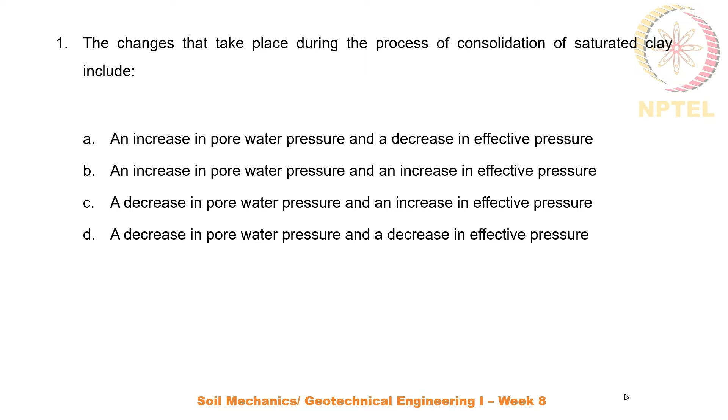All right. So the correct answer is option C. So during the process of consolidation, pore water will get expelled out of the soil pores. So pore water pressure decreases and hence effective stress will increase. I hope that is clear to you. During the process of consolidation, the pore water is being expelled and hence the pore water pressure decreases, which in turn causes the increase of effective stress.

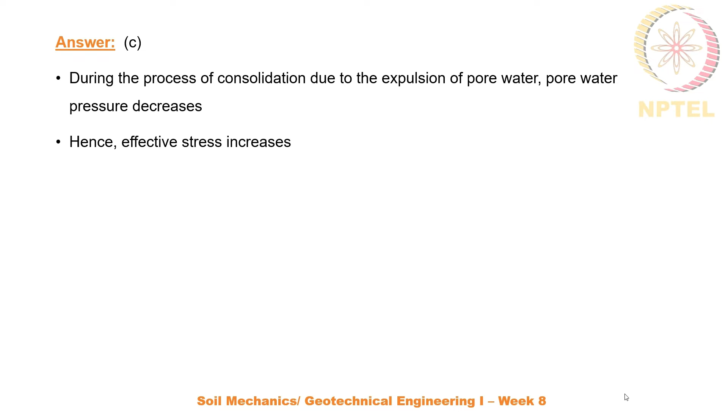Moving on to the next question. The stress strain behavior of soils as shown in the curve 2 in the figure corresponds to option A, loose sand and over consolidated clay. Option B, loose sand and normally consolidated clay. Option C, dense sand and normally consolidated clay, and option D, dense sand and over consolidated clay. So the curve 2 represents which type of soil? Loose sand, dense sand, normally consolidated clay, or over consolidated clay? The given graph is a stress strain graph. Which one is the correct option?

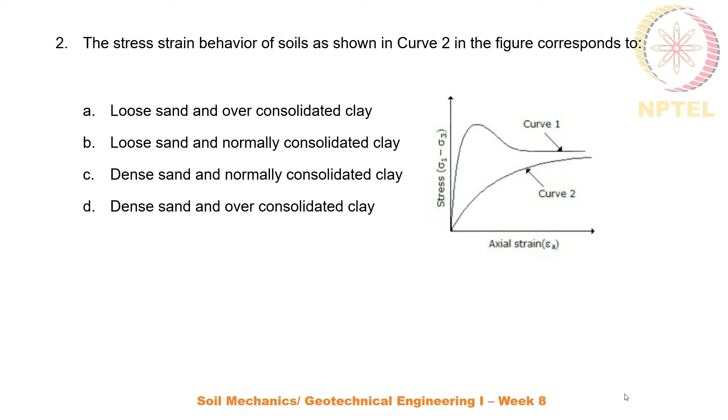Okay, so the correct answer is option B. So we know these two graphs. This is the standard graph plotting deviator stress and axial strain, deviator stress on y-axis and axial strain on x-axis. There we can see the lower curve, that is the curve 2 in our problem, represents loose sand and normally consolidated clay. Curve 1 represents dense sand and over consolidated clay.

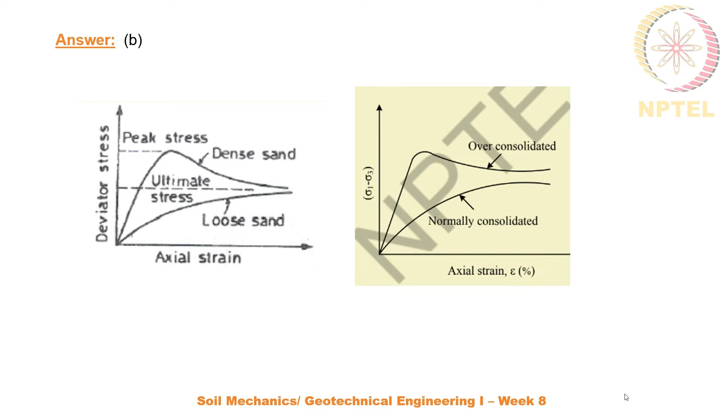Alright, so here we have the third question. The void ratio pressure diagram of a soil sample is shown in figure below. We are given a void ratio pressure diagram and asked to determine the coefficient of compressibility. Option A 0.35, option B 0.2, option C 0.15 and option D 0.014. It's easy to solve. It's a direct substitution in the equation for coefficient of compressibility connecting void ratio and pressure. So which is the correct answer?

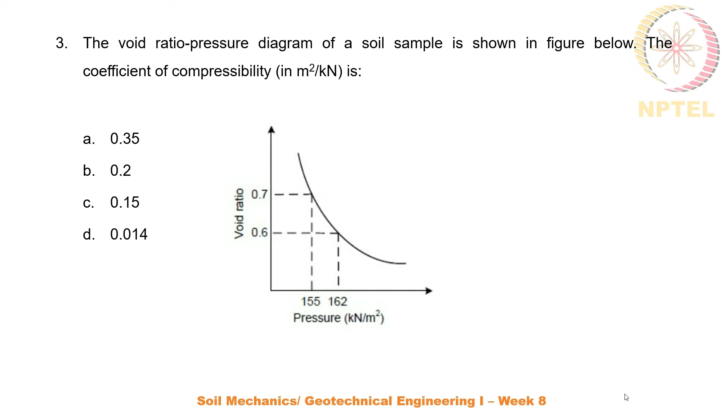Okay, let's see which is the correct option. So we are given the void ratio initially as 0.6 and finally 0.7. In this curve we are given two void ratios and corresponding pressure values, e1, e2 and p1, p2. So e1 is 0.6, e2 is 0.7, p1 155 and p2 162. The coefficient of compressibility is given by the equation delta e by delta p.

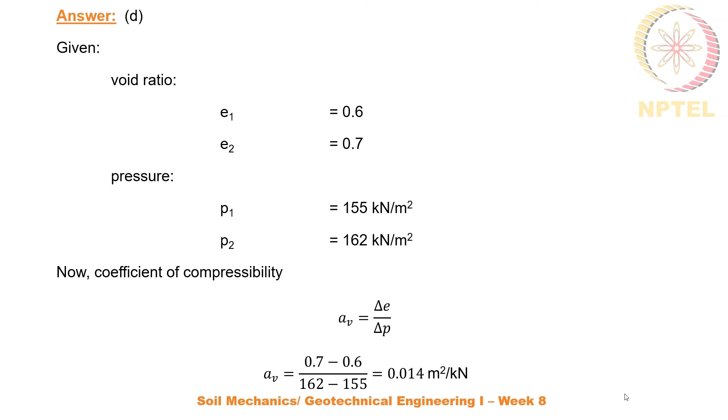That is, the ratio of change in void ratio to change in pressure gives the coefficient of compressibility. So, substituting the given values, we get coefficient of compressibility as 0.014 meter square per kilonewton. The answer is option D. Hope that is clear to you.

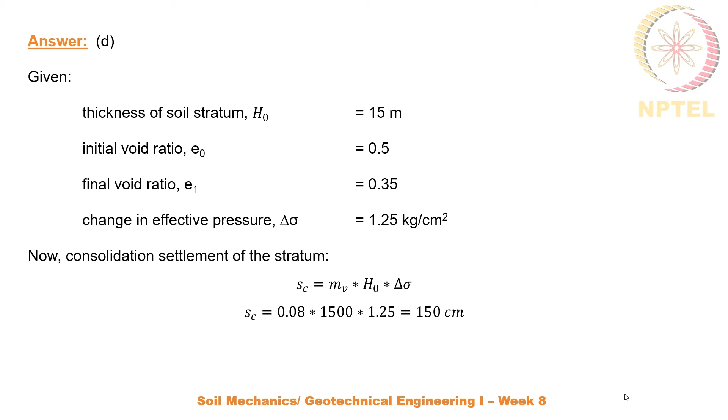Okay, I think we have lost the friend who answered it as C. I think it's clear to him also. Okay, we'll move on to the next question.

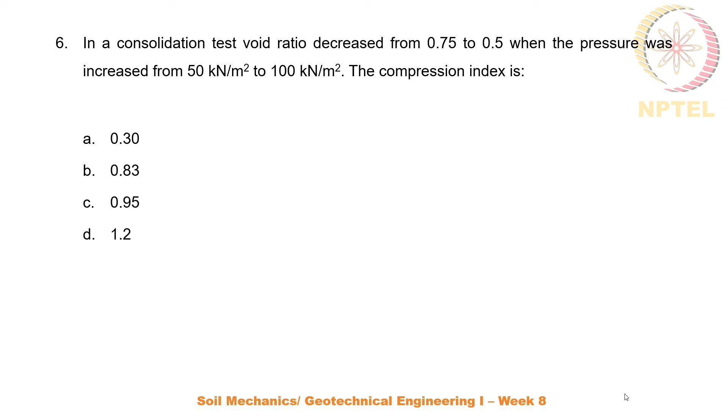Option A 0.3, option B 0.83, option C 0.95, option D 1.2. Which is the correct option? Okay, so we'll check how to solve this problem. We are given the initial void ratio 0.75, final void ratio 0.5, initial pressure 50, and final pressure 100.

The compression index is given by the equation Cc is equal to delta e by log to the base 10 sigma 2 by sigma 1, or P2 by P1, where sigma or P represents the pressure and e the void ratio. Substituting the values, we have compression index Cc is equal to 0.75 minus 0.5 divided by log to the base 10 of 100 by 50. So the value we get is 0.83. The compression index we get as 0.83.

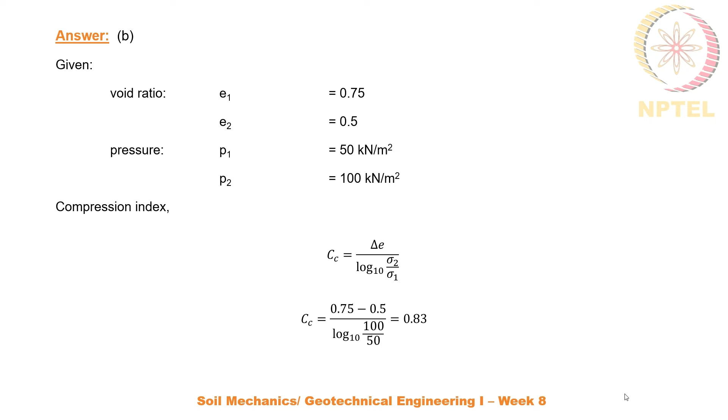Okay. Next question, question number 7. The natural void ratio of a 4.8 meter thick saturated clay strata is 0.97. The void ratio of the clay at the end of the consolidation is expected to be 0.64. The total consolidation settlement of the clay strata is option A 80, option B 90, option C 70, and option D 50.

We are given that the natural void ratio of the 4.8 meter thick clay layer is 0.97 and the final void ratio is 0.64. We are asked to determine the total consolidation settlement of the clay strata in centimeter.

Okay, the correct answer is option A. So we are given initial void ratio as well as final void ratio, also the thickness of the soil strata. So the total consolidation settlement of the clay strata can be estimated by using the relation between delta H by H and delta e by 1 plus e0.

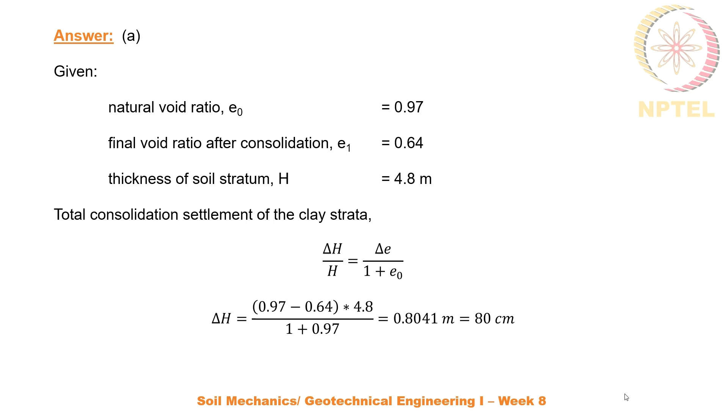Okay, moving on to the next question. Question number 8. Due to the construction of a new structure, the average vertical pressure at the center of a 2.5 meter thick clay layer increases from 100 kilopascal to 200 kilopascal. A laboratory consolidation test was performed on a 20 mm thick undisturbed sample of the clay. Under applied stresses of 100 kilopascal and 200 kilopascal, the void ratios of the sample were found to be 0.9 and 0.786 respectively.

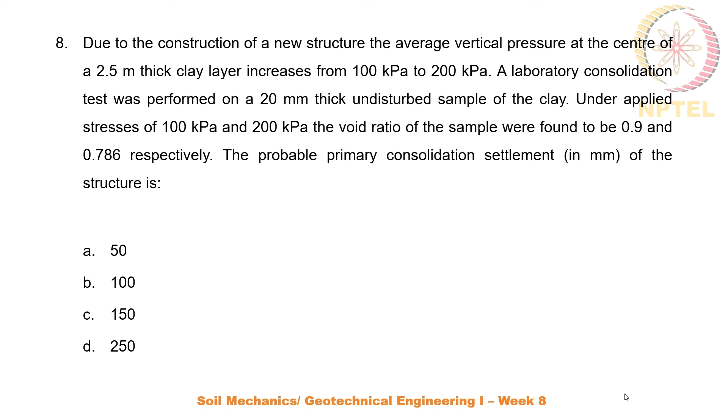The probable primary consolidation settlement of the structure is option A 50, option B 100, option C 150, option D 250. So here the vertical pressure is increasing from 100 to 200 kilopascal and the void ratio is decreasing from 0.9 to 0.786. We are asked to determine the probable primary consolidation settlement for the structure. The correct option is option C.

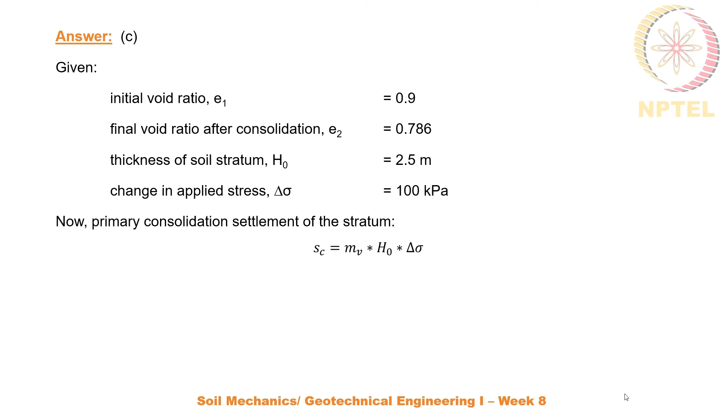So we are given initial void ratio and final void ratio, thickness of the soil stratum and change in applied stress. So the equation for primary consolidation settlement, as we have seen in the earlier questions, Sc is equal to mv into H naught into delta sigma. So here mv is equal to delta e by delta sigma into 1 plus e naught, which gives the coefficient of volume change as we have seen in the earlier problems. H naught is directly given in the question and delta sigma is also mentioned. So first we need to calculate the coefficient of volume change mv.

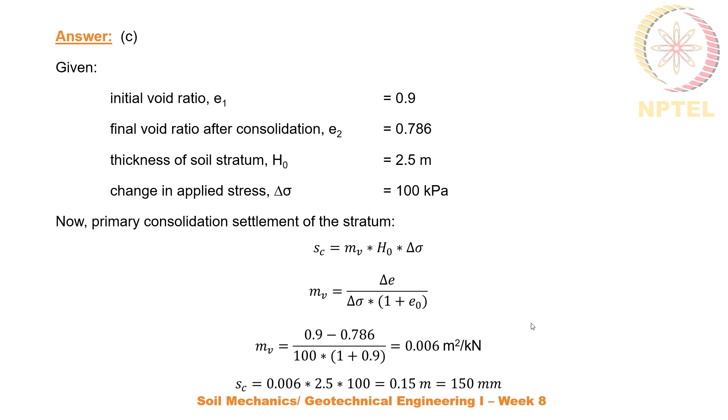Substituting the values, we have coefficient of volume change mv is equal to 0.9 minus 0.786 by 100 into 1 plus 0.9, which will give a value equal to 0.006 meter square per kilonewton. Now substituting all the values in the primary consolidation settlement equation, Sc as 0.006 into 2.5 into 100, which gives you 150 mm. That is option C. Moving on to last question for today's session.

A 3-meter thick layer of saturated clay lies in between two permeable layers. The clay has a liquid limit of 45% and initial void ratio of 1.25. The initial effective overburden pressure at the middle of the clay layer is 500 kilopascal and is likely to increase to 1000 kilopascal due to the construction of a new building. The probable primary consolidation settlement of the building and the final void ratio of the clay are respectively. So, here in this question, the thickness of the saturated clay layer is 3 meter. It has a liquid limit of 45% and initial void ratio of 1.25. The initial and final effective overburden pressure is 500 and 1000 kilopascal respectively. We are asked to determine the probable primary consolidation settlement and the final void ratio.

Option A 95.4 and 0.955. Option B 126.4 and 1.155. Option C 155.8 and 0.857. Option D 200.5 and 0.754. So we'll see how to solve this problem. The correct answer is option B, that is 126.4 mm primary consolidation settlement and 1.155 final void ratio. We'll see how to solve this. Here given the thickness of clay layer as 3 meter, liquid limit of clay layer as 45 percentage, initial void ratio 1.25, initial effective overburden pressure as 500 kilopascal, expected final overburden pressure as 1000 kilopascal.

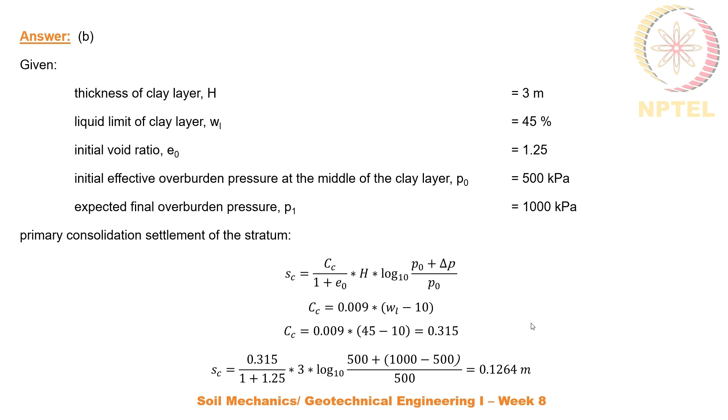Substituting all the values in the equation for primary consolidation settlement of the stratum, we have Sc is equal to 0.315 by 1 plus 1.25 into 3 into log to the base 10 of 500 plus 1000 minus 500 by 500, which gives you a value 0.1264 meters or 126.4 mm. We're also asked to determine the value of final void ratio. So as we saw earlier, we have the relation delta e by 1 plus e naught is equal to delta H by H, or delta e is equal to delta H by H into 1 plus e naught. Substituting the values, we have delta e is equal to 0.1264 by 3 into 1 plus 1.25, which gives you a value of 0.0948.